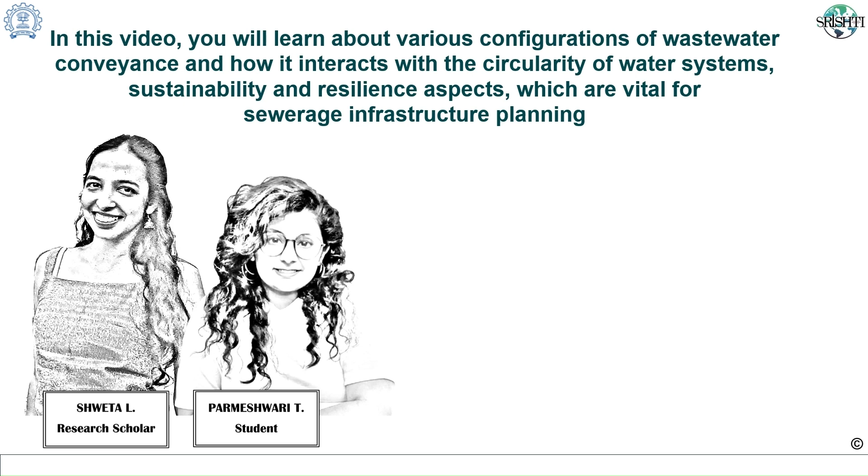In this video, you will learn about various configurations of wastewater conveyance which are vital for sewerage infrastructure planning. Welcome to our city. As you are all aware, cities typically consist of various types of areas and building typologies, such as residential buildings, where people reside, and depending on their standard of living and types of houses, residential areas are classified as high income, middle income, and low income housing.

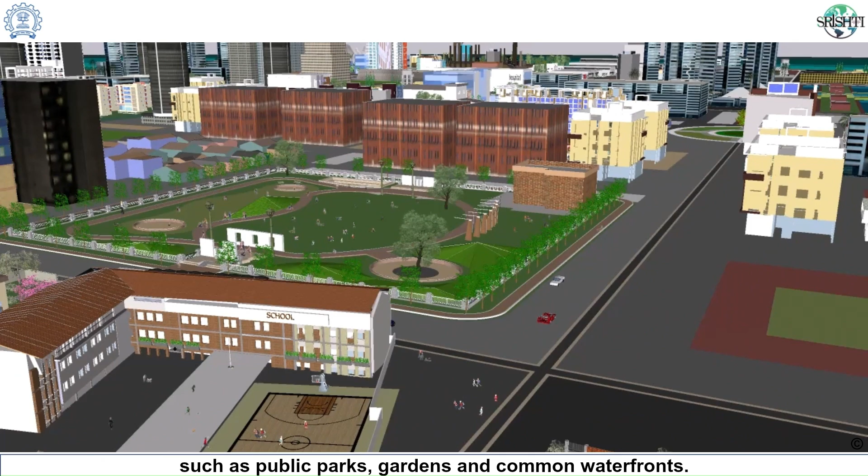Then there are commercial buildings, from where businesses operate, and these include offices, shopping centers, and restaurants. There are also institutional buildings such as hospitals, schools, and transportation hubs. Also, cities have public spaces or recreation places such as public parks, gardens, and common waterfronts. Depending on the city, some industries or factories may also be present where goods are produced or stored. At times, agricultural areas may be present near the city's fringes. There are several water bodies near or amidst the city.

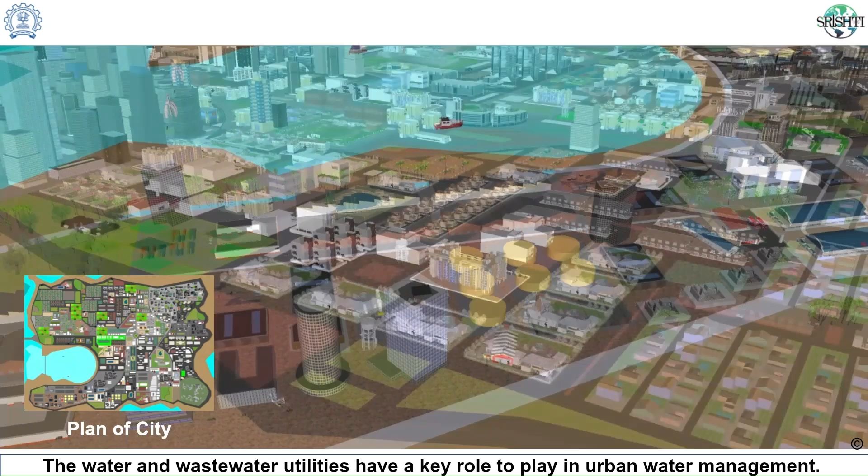Hey, but why are the water bodies so polluted these days? Unfortunately, this is true. Water is a lifeline we often overlook. The urban water systems are the unsung heroes that keep our cities hydrated and thriving. And how it is managed can greatly impact our daily lives. The water and wastewater utilities have a key role to play in urban water management. As for all citizens, it is important to understand how water interacts with different parts of the city.

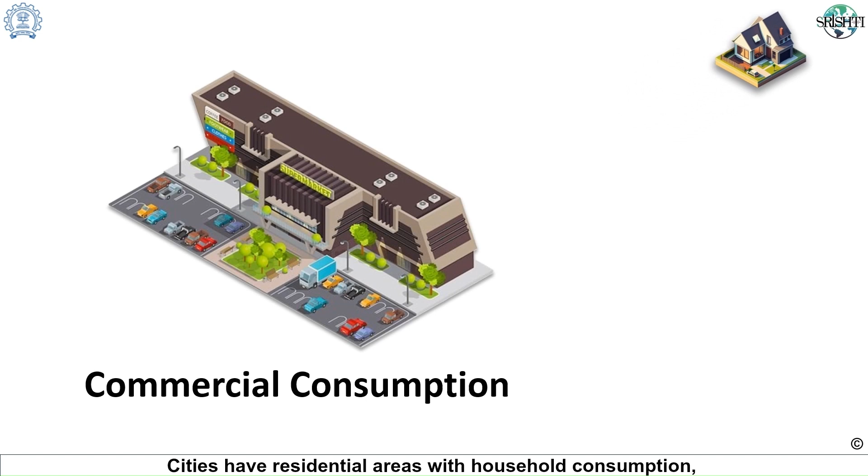Water interacts with city? What do you mean by that? Well, let us understand the present approach of water provisioning in cities and its environmental implications. Cities have residential areas with household consumption, commercial and institutional demands, agricultural landscapes or recreation spaces, industries, and various natural water bodies. We have an electricity grid to provide energy. Every city has a mix of all these elements having various water demands.

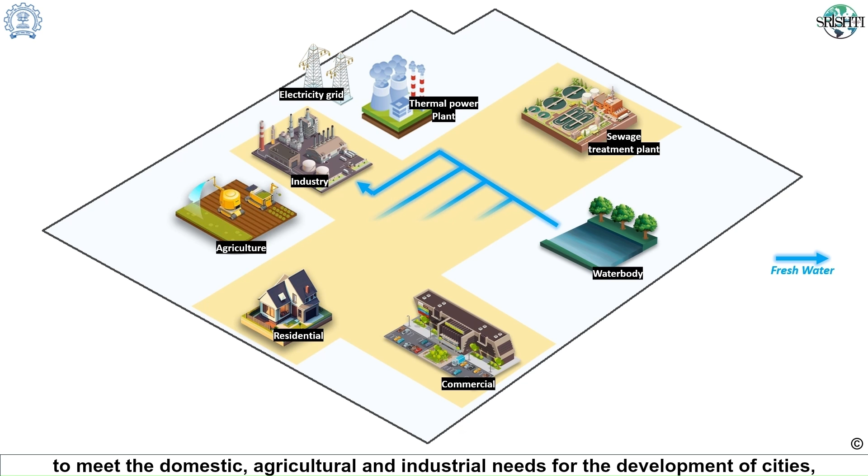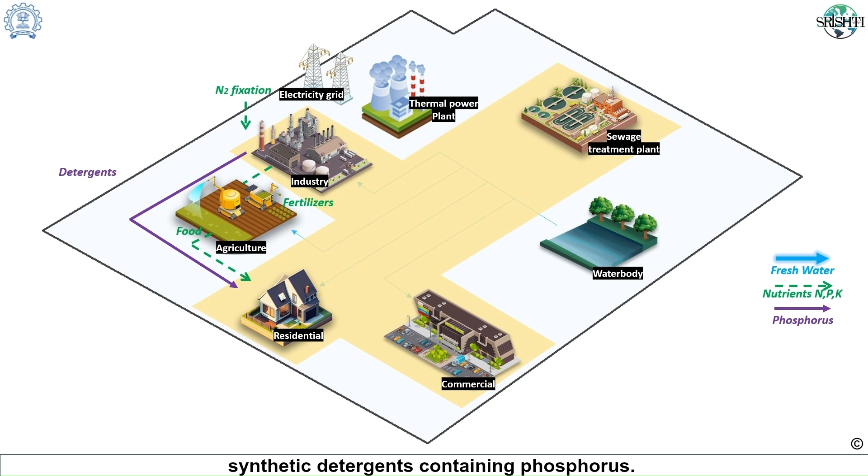Typically, fresh water is transported from long distances to meet the domestic, agricultural, and industrial needs for the development of cities, which involves huge transportation costs and consumes energy. Conventionally, agriculture involves indiscriminately using artificial nitrogen fertilizers, and the fertilizer production is highly energy intensive. Additionally, urban citizens are increasingly consuming synthetic detergents containing phosphorus. Furthermore, apart from domestic sewage, the modern lifestyle of urban citizens has introduced emerging contaminants through pesticides, insecticides, cosmetics, toxic wastes from industries, etc. All of this consumed water finds its way to the centralized sewage treatment plants.

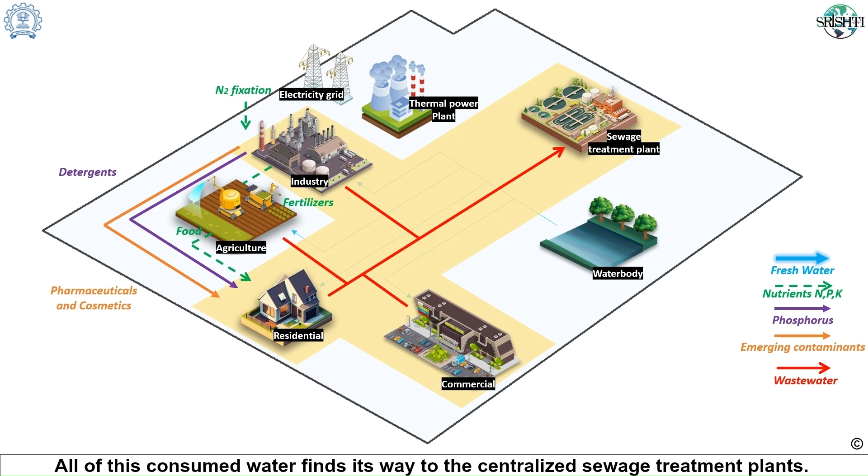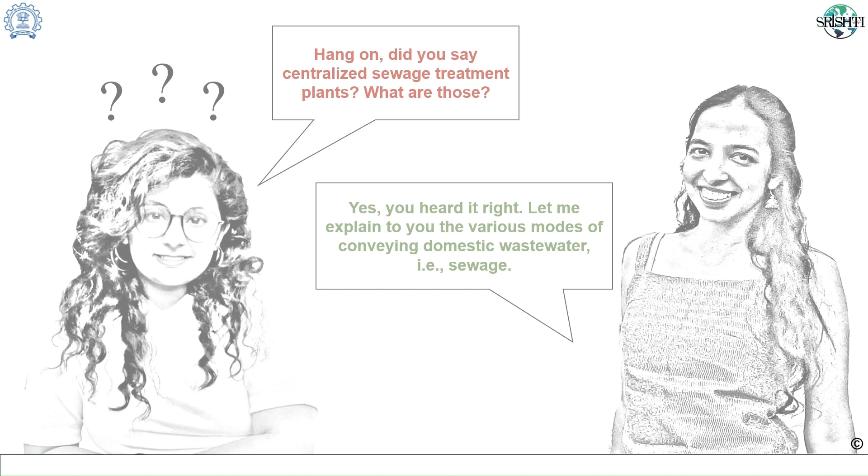Hang on. Did you say centralized sewage treatment plants? What are those? Yes, you heard it right. Let me explain to you the various modes of conveying domestic wastewater, that is, sewage. Practically, every region has a variety of settings such as rural, peri-urban, and urban. Even in an urban city, there may be pockets of informal settlements or a diverse housing typology. Some cities might have adjoining agricultural or industrial areas.

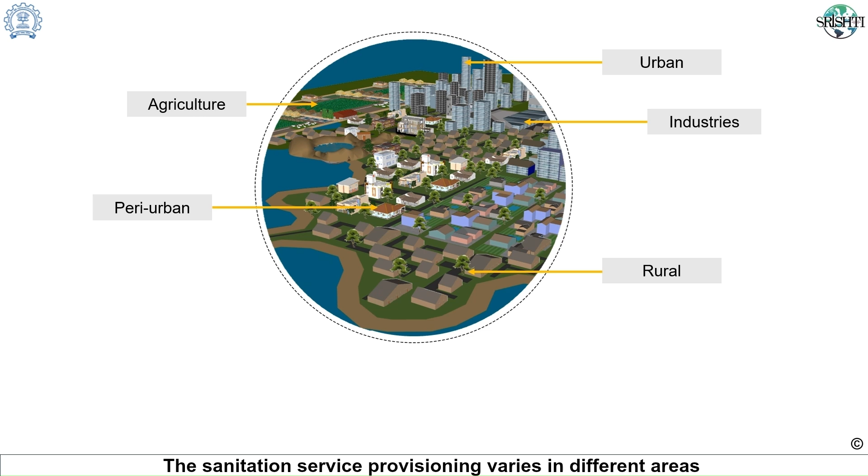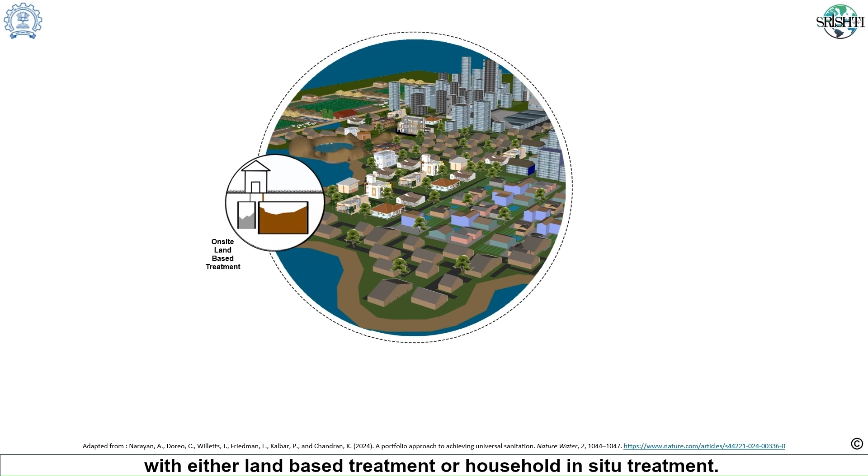The sanitation service provisioning varies in different areas according to the sanitation infrastructure, that is, the type of toilets and whether the different wastewater streams are separated or combined. Accordingly, the wastewater characteristics vary in different regions. Some areas might have on-site sanitation facilities with either land-based treatment or household in-situ treatment. Some areas may have on-site storage, transport, and treatment of wastewater. Usually, in cities, sewage is transported through sewer networks and collected in sewage treatment plants.

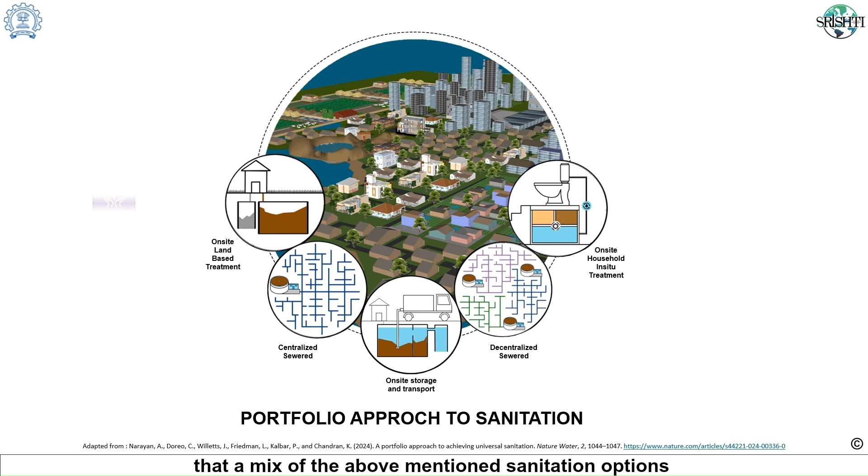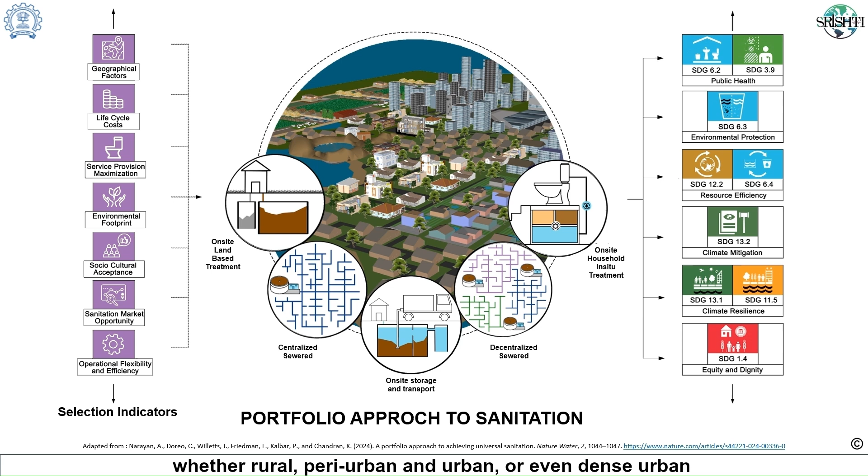The portfolio approach emphasizes that a mix of the above-mentioned sanitation options could be relevant for a city or a region, and selection indicators beyond economics should be used to choose the appropriate sanitation option as per the ground situation and decision-making context, whether rural, peri-urban and urban or even dense urban, to achieve various outcomes such as the Sustainable Development Goals. The portfolio approach provides an opportunity to achieve universal improved sanitation sustainably.

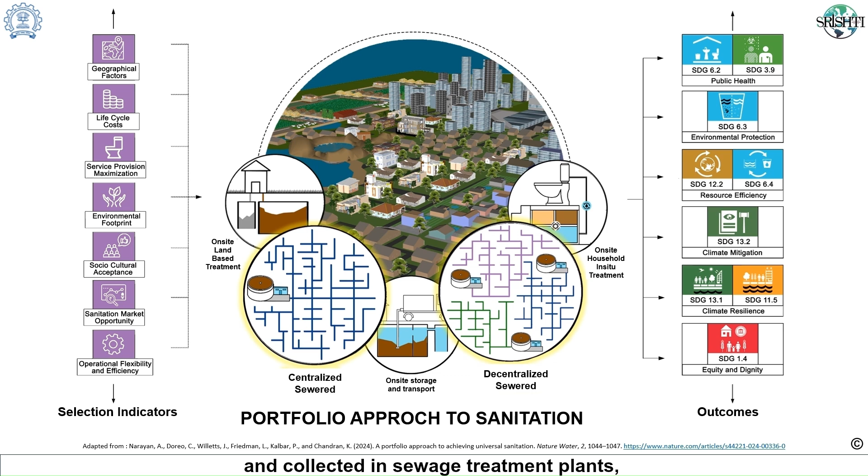Usually, in cities, sewage is transported through sewer networks and collected in sewage treatment plants, which should be the aspiration for all the cities. But how to do it sustainably is a big challenge. Sewer networks can be adopted in a centralized or decentralized manner. Let us understand the difference between these configurations. Typically, designers use the centralized sewer network as the primary approach.

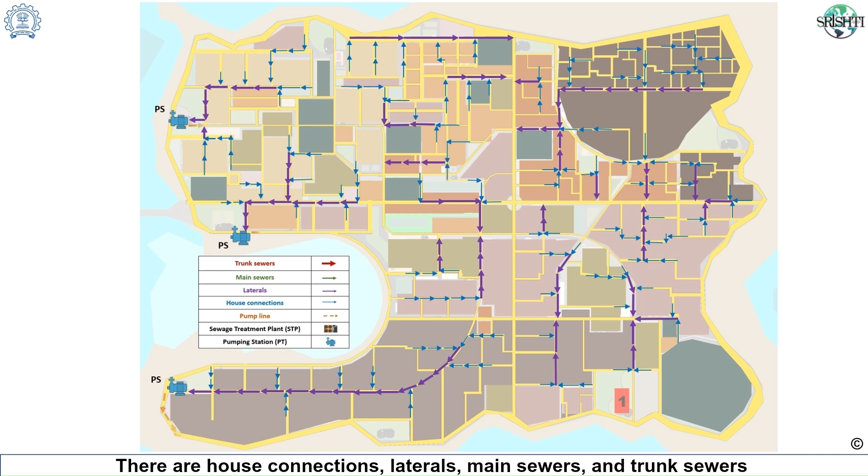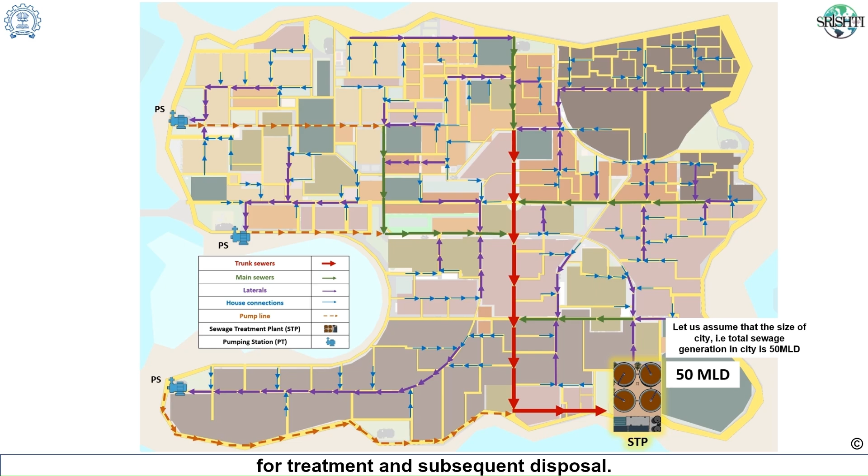Centralized sewerage infrastructure implies that the domestic wastewater or sewage is collected from the entire city or region under consideration. There are house connections, laterals, main sewers, and trunk sewers that finally carry the wastewater from far off distances to a single point of treatment. This results in a single large capacity of treatment plants, and since it is difficult to find a large piece of land within the city, sewage is often transported away from the city to the outskirts for treatment and subsequent disposal. The key advantage with centralized approach is that the economy of scale is reached for large-sized wastewater treatment plants, making wastewater treatment cost-effective.

Biological treatment systems also function well at a large scale. It allows for streamlined operations, implementation of advanced mechanized technologies, and sophisticated treatment processes, thus ensuring high water quality and consistency. Given the advantages of centralized infrastructure, why is most sewerage infrastructure failing? And why are centralized treatment systems being criticized?

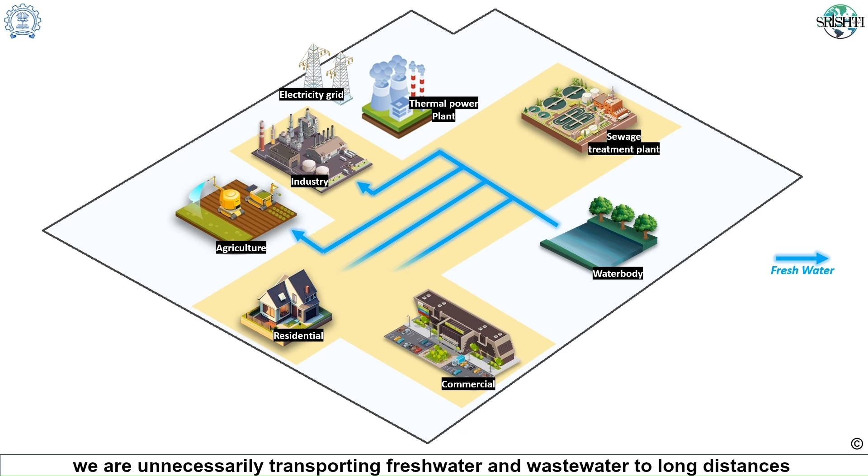There are several complexities, and every coin has two sides, right? So, if you holistically look at the region, we are unnecessarily transporting freshwater and wastewater to long distances in the process of centralization. Firstly, we spend tremendous energy to fix nitrogen for artificial fertilizer production. Next, the nutrients nitrogen and phosphorus enter the cities through food cycle and other products we use in our day-to-day lives, which find their way in the wastewater.

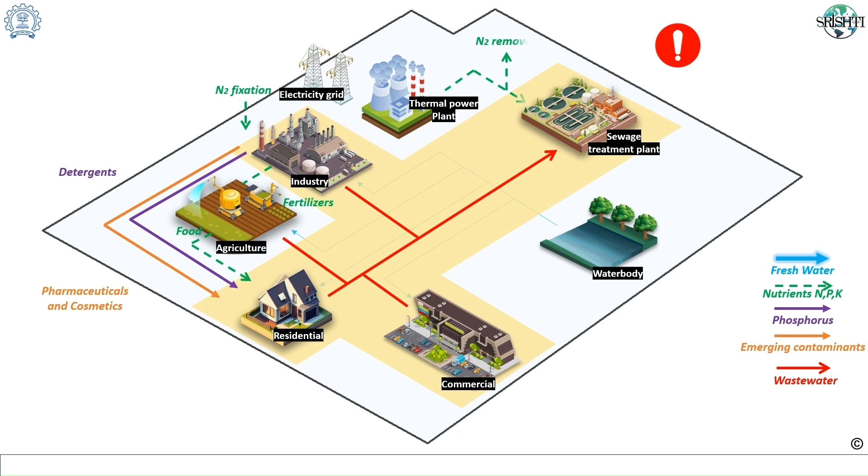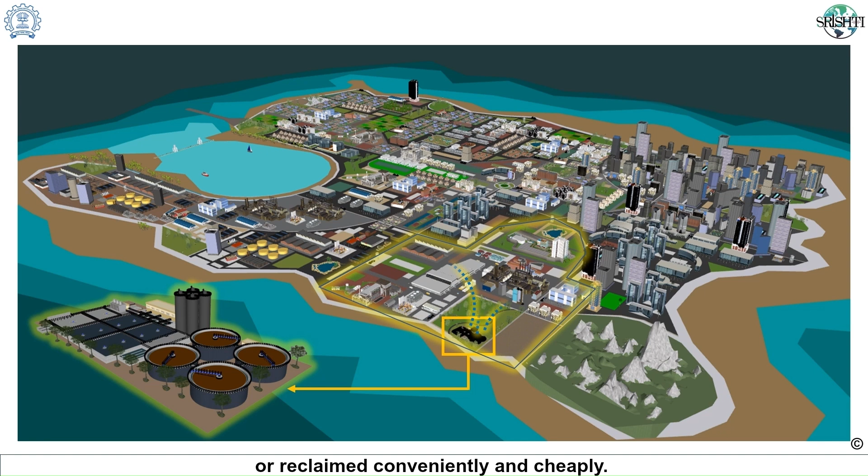If the sewage treatment plants fail to function or do not perform up to the standards, untreated or partially treated wastewater enters the water bodies and causes eutrophication. Also, it is difficult to achieve water circularity in centralized systems as long redistribution networks might need to be constructed. Hence, only a small fraction of treated wastewater can be recycled or reclaimed conveniently and cheaply. Thus, for cities aiming to integrate circular economy practices, centralized systems are not favored.

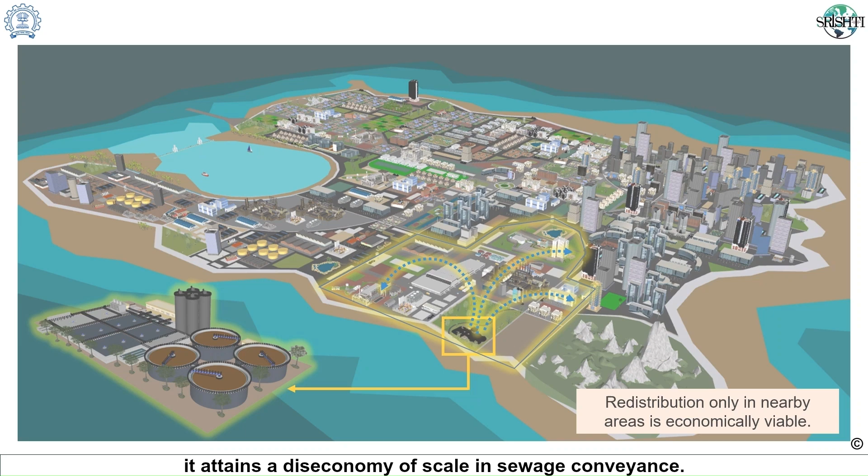Although centralized infrastructure is commonly adopted due to the scale of economies achieved in sewage treatment, it attains a diseconomy of scale in sewage conveyance. Diseconomy of scale in sewage conveyance? What do you mean by that? To understand that, you need to think from a systems perspective.

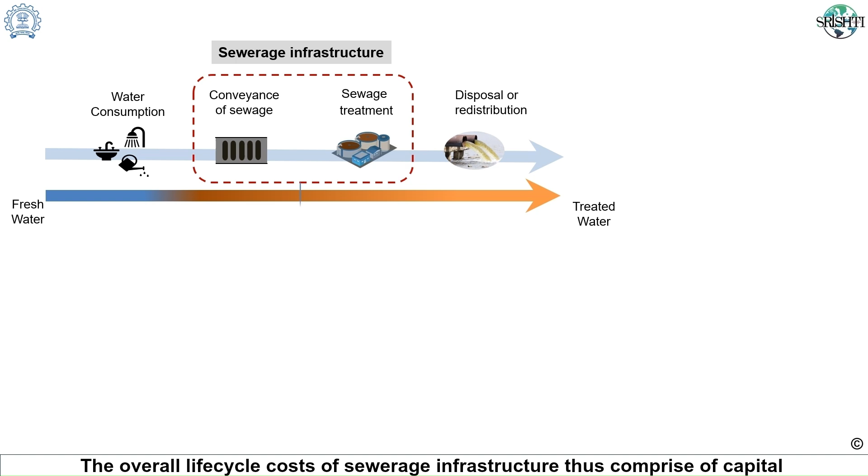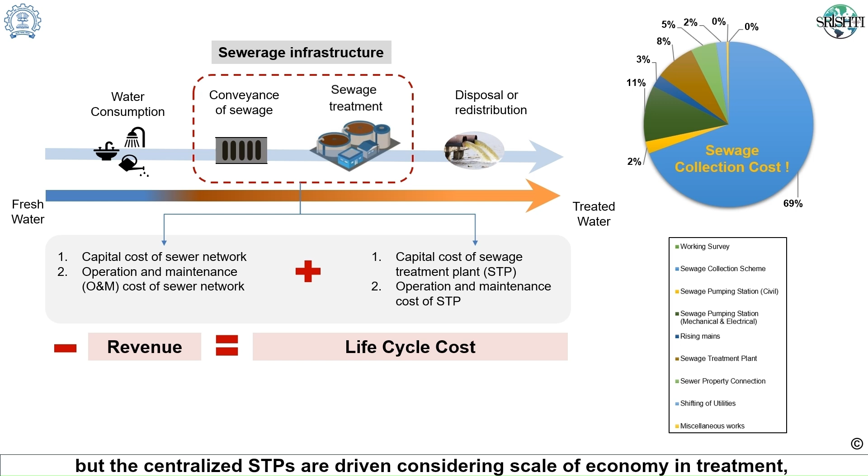The sewerage infrastructure comprises of sewer networks that collect wastewater and sewage treatment plants. The overall life cycle costs of sewerage infrastructure thus comprise of capital and operation and maintenance costs of the sewer network as well as the sewage treatment plants. The network cost constitutes a major share of the total cost, but the centralized STPs are driven considering scale of economy in treatment, which constitutes 20 to 30% of the project cost.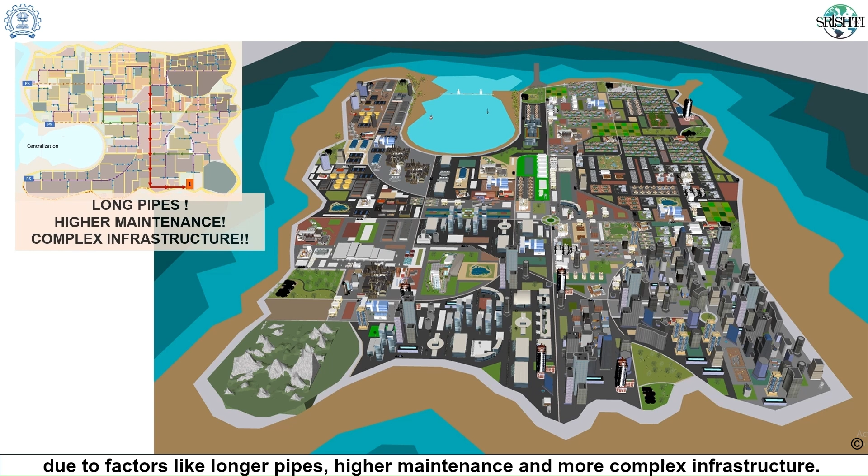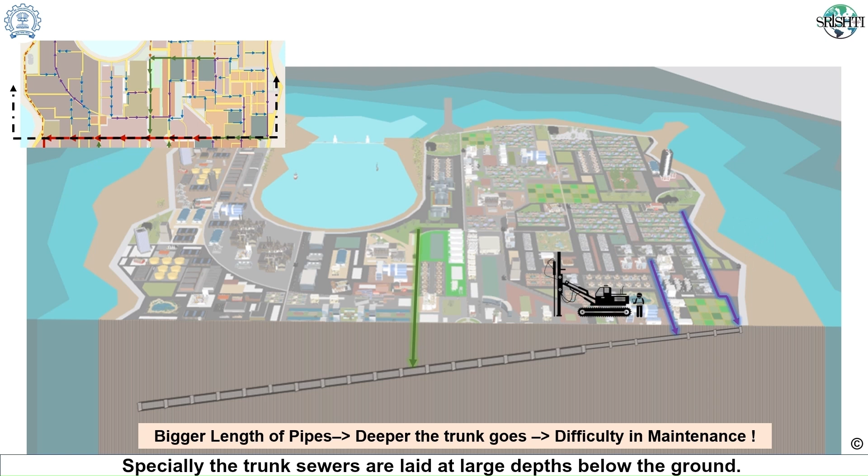Although centralized treatment is cost effective, it leads to massive investments in laying the sewer network. The sewers are laid at a slope for using the gravity. Hence, long sewer lengths lead to deeper sewers. Especially the trunk sewers are laid at large depths below the ground. The construction of these trunk sewers involves massive excavation, and such mega projects often result in huge delays.

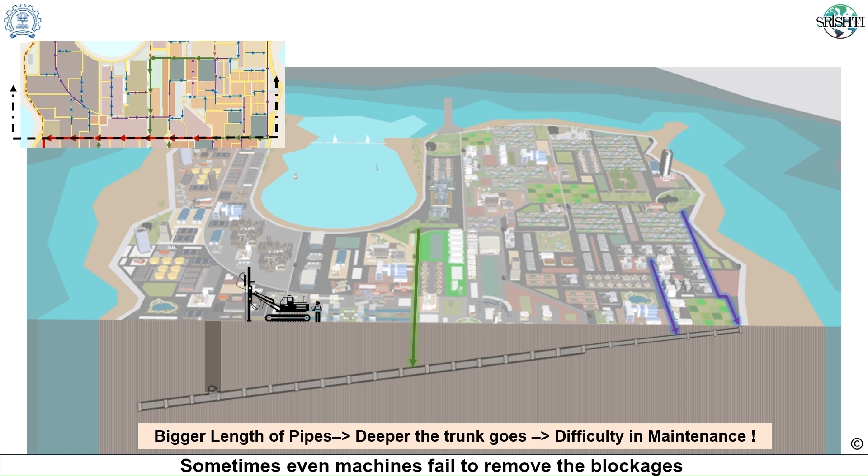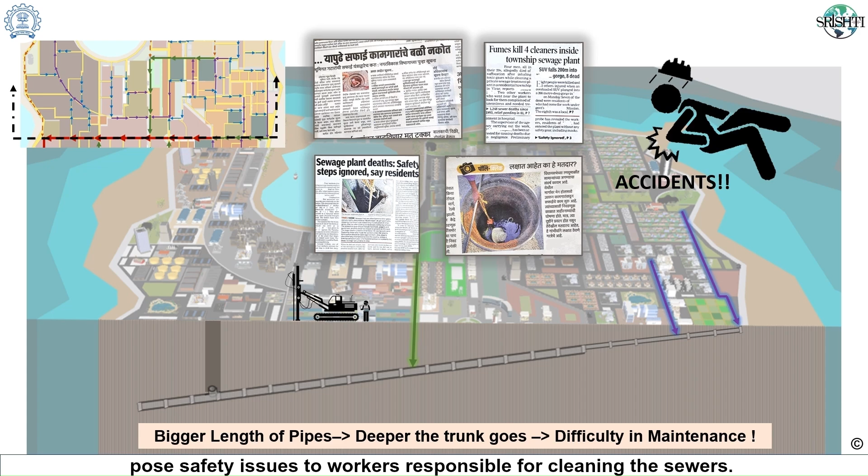Additionally, these sewers are difficult and costly to maintain in the long run. Complex equipment and machinery are needed for cleaning the choked sewer lines. Sometimes, even machines fail to remove the blockages, and sanitation workers are forced to enter the manholes to clean the sewers. Despite the legal ban on manual scavenging, it is still practiced in cities, as evident from such news articles. Thus, the deep sewers in highly centralized systems pose safety issues to workers responsible for cleaning the sewers.

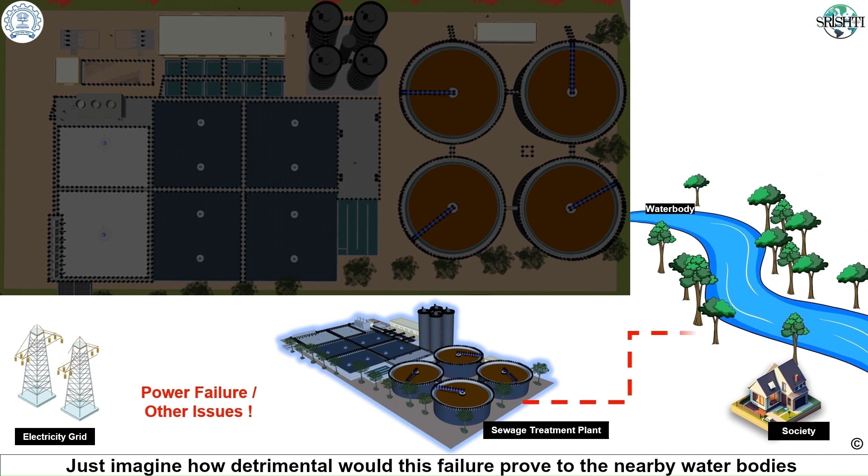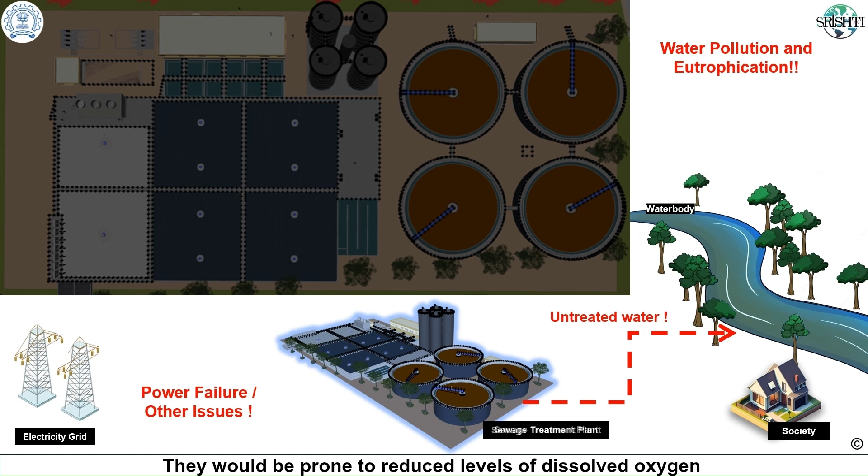Moreover, extreme centralization comes with significant risks, as they are highly vulnerable. A single large-sized STP serves as a single point of failure in case of equipment malfunction, a natural disaster, or an act of vandalism. And this can disrupt the wastewater treatment services for the entire city. Just imagine, how detrimental would this failure prove to the nearby water bodies where untreated wastewater is being disposed? They would be prone to reduced levels of dissolved oxygen, affecting the marine ecology, and also prone to eutrophication.

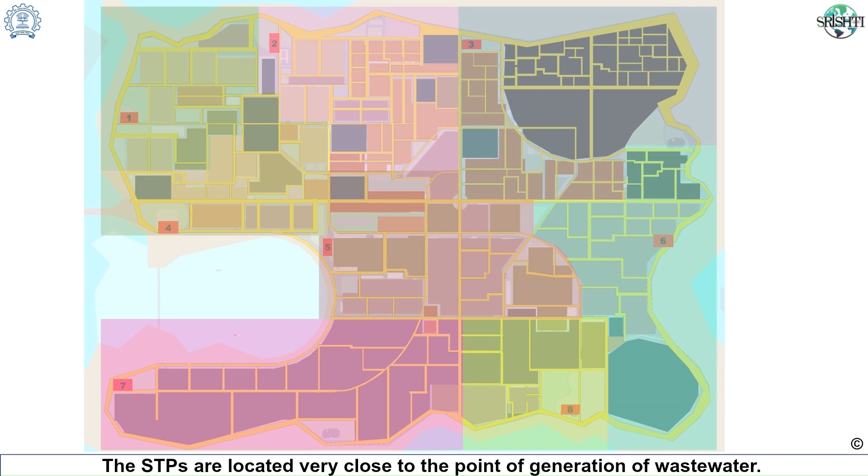Oh, I understand now. As per my knowledge, decentralized infrastructure is the alternative for centralized systems, right? But what do you exactly mean by decentralization? Okay, now let us explore the decentralized network configuration. In this scenario, there are several STPs for the city or region under consideration. The STPs are located very close to the point of generation of wastewater. This eliminates the long sewer networks and facilitates simultaneous implementation of multiple STPs. This reduces the overall time of implementing the project.

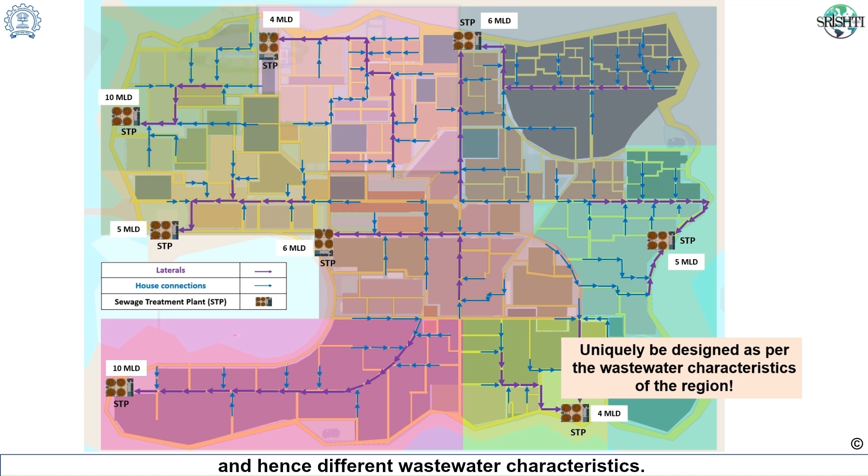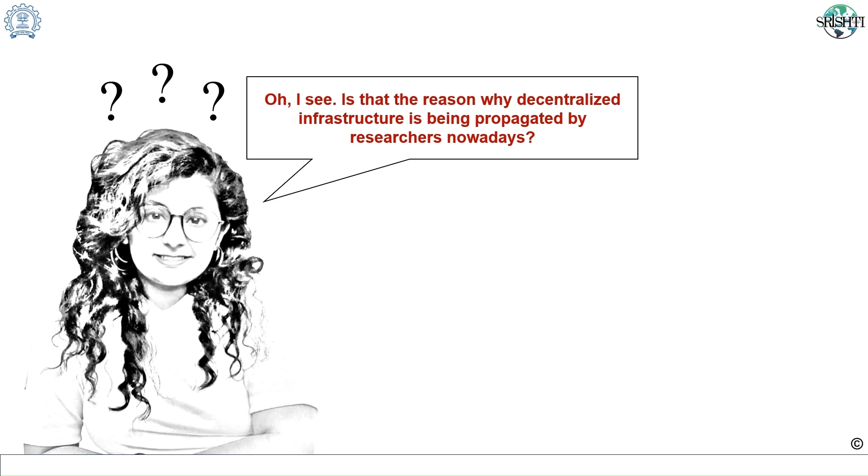Moreover, each of the served areas may have different water demands and hence different wastewater characteristics. For example, wastewater generated from the residential, commercial, and industrial land uses may differ slightly. Decentralized treatment facilities can uniquely be designed as per the wastewater characteristics of the region. Oh, I see. Is that the reason why decentralized infrastructure is being propagated by researchers nowadays? Yes, there are several advantages of decentralized systems.

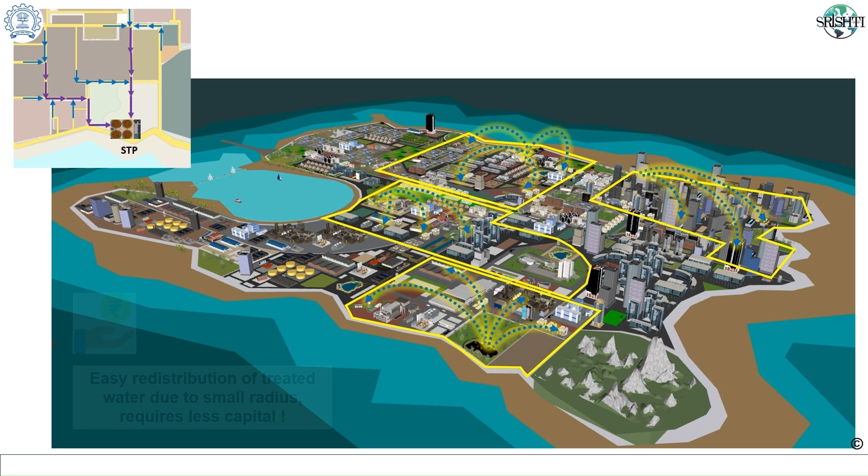Especially if the cities are to adopt a circular approach for water management, decentralized systems are highly suitable. They serve as alternate sources of water, which can be used for secondary purposes such as toilet flushing or landscaping. Also, if one STP fails or encounters an issue, it impacts only a small area, not the entire city, as the sewage treatment service is disconnected among all STPs. The different STPs can adopt location-specific sewage treatment technologies.

Okay, so as I understand, decentralized configurations are pretty resilient. They should definitely be the way ahead for infrastructure planning, right?

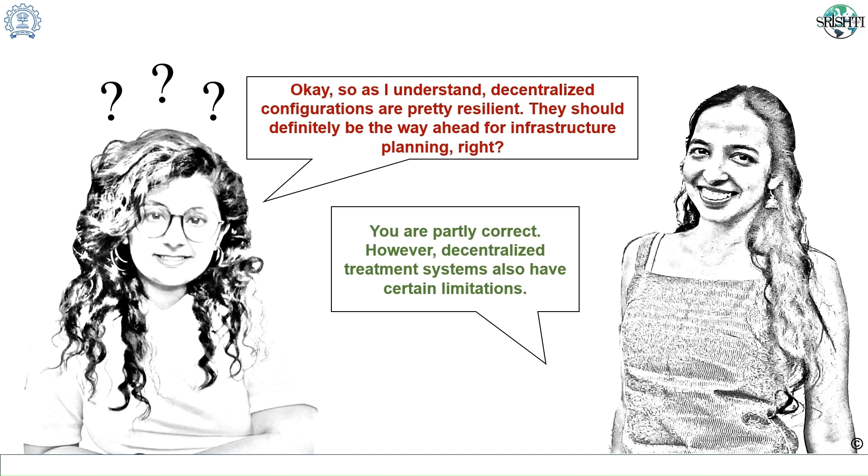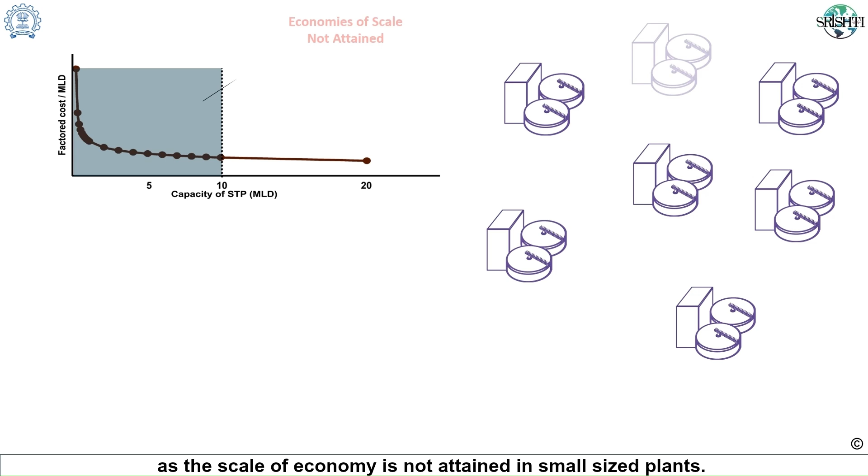You are partly correct. However, decentralized treatment systems also have certain limitations. Managing and maintaining numerous independent systems can be costly and cumbersome for wastewater utilities. If too small-sized sewage treatment plants are planned using biological treatment, the STP tends to fail or incurs substantial costs,

as the scale of economy is not attained in small-sized plants. In case of lack of ownership by the households or residential dwellers in operation and maintenance of STPs, governing a large number of STPs might become a huge challenge for the wastewater utilities. Thus, coordinating the effective maintenance and ensuring compliance with regulations can be burdensome for the regulatory authorities.

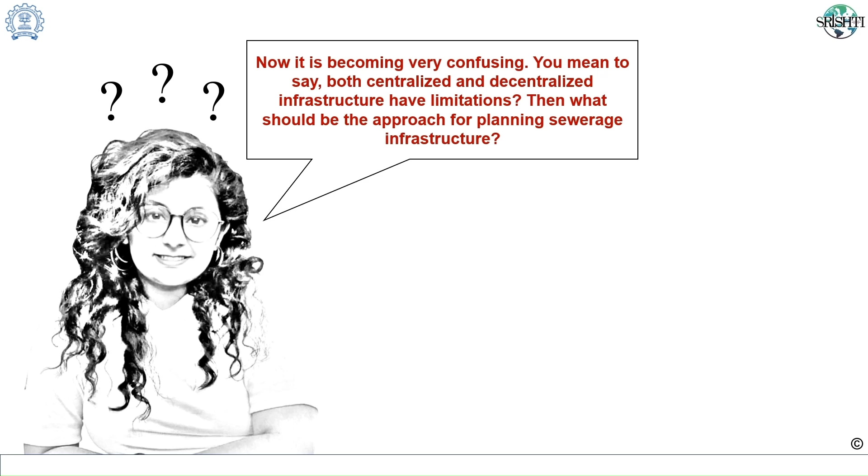Now it is becoming very confusing. You mean to say both centralized and decentralized infrastructure have limitations? Then what should be the approach for planning sewerage infrastructure?

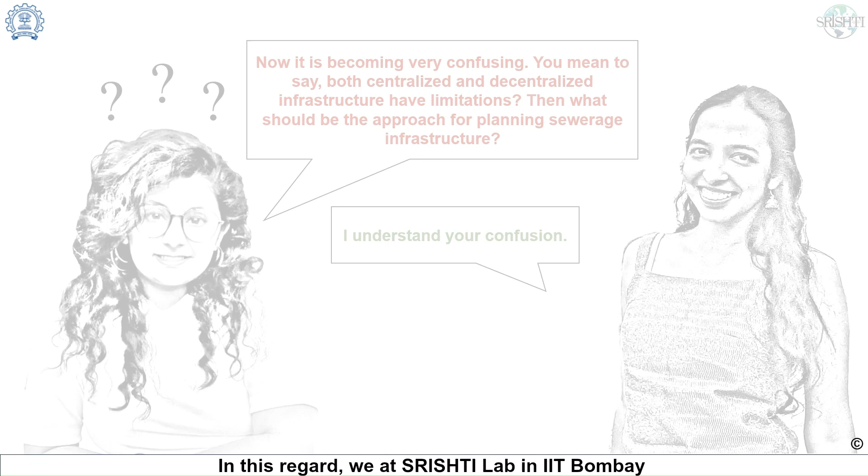I understand your confusion. In this regard, we at Srishti Lab in IIT Bombay have developed the concept of appropriately scaled decentralization. I assume that by now you are at least able to appreciate the complexities of planning sewerage infrastructure.

You see, when we talk about decentralized systems, it can mean several alternatives. So, deciding the scale of implementing decentralized infrastructure is very crucial. As we discussed, extreme decentralization also has its own challenges.

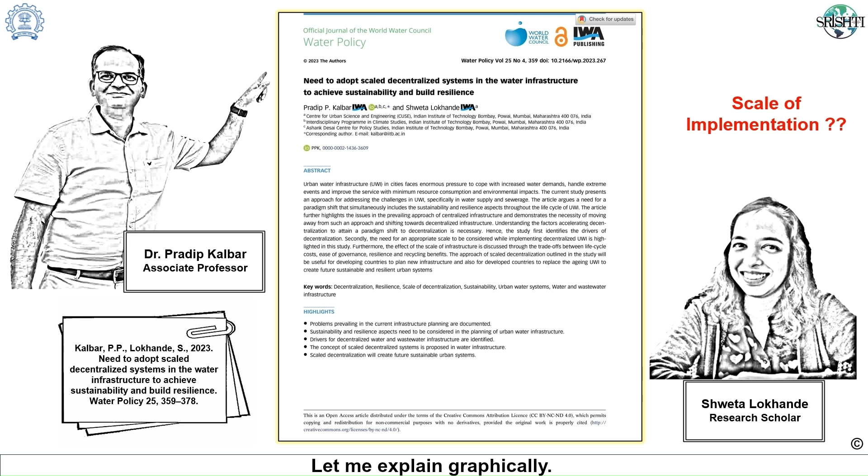Let me explain graphically. In this figure, the x-axis represents the scale or extent of decentralization. On one side, there are highly centralized systems, say at city scale. On the other hand, there are extreme decentralized systems, say at building scale.

In this figure, the notional trends of each driver are represented, which are normalized on a scale of, say, 0 to 1.

The life cycle cost is highest for centralized systems due to large infrastructure scale and intense energy usage. It reduces as we move towards decentralization, but again increases due to increased number of sewage treatment plants.

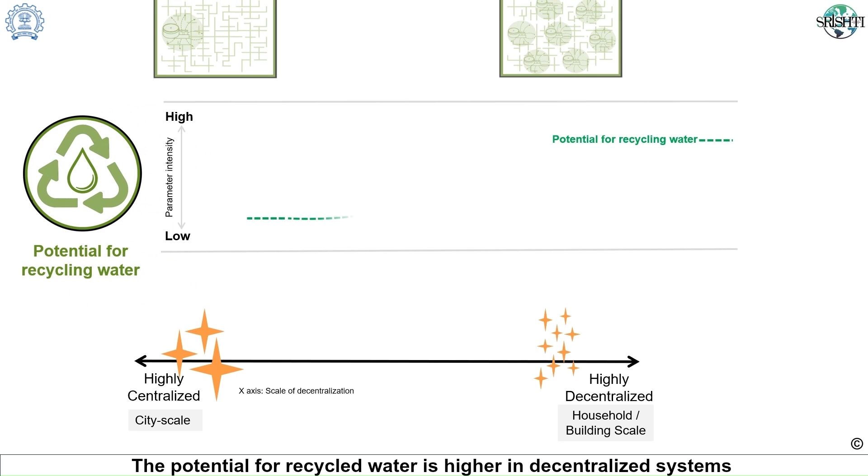Social benefits in terms of local employment opportunities and community participation are higher in decentralized systems. The potential for recycled water is higher in decentralized systems where water is treated at the source and can be used at lower redistribution costs.

Efficient resource recovery depends on source separation, which is better achieved in a decentralized system. But for resource recovery to be economically viable, some scale is needed, which is sought somewhere in the middle.

The environmental impacts are higher in centralized systems due to intensive use of energy. It reduces and again increases towards decentralization due to higher resource consumption in decentralized STPs.

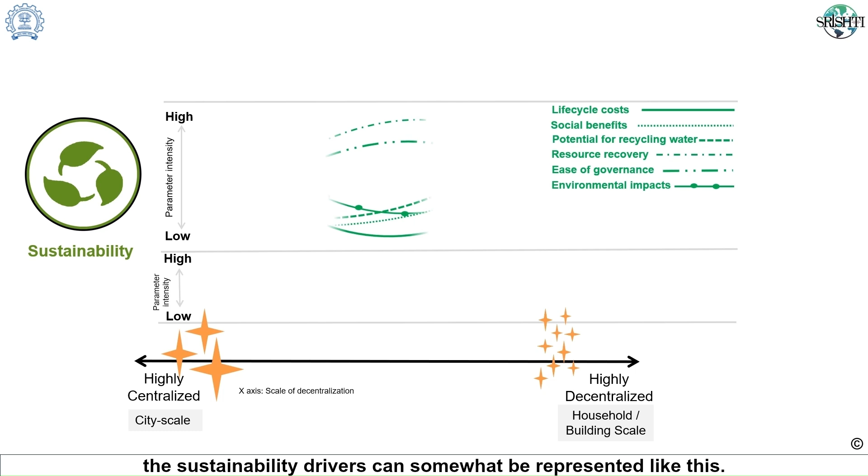Ease of governance is also considered to be maximum at the center, as the complexity of outsourcing and commissioning the projects increases for larger centralized systems. Also, operation and maintenance cost can become cumbersome for too many systems and is hence better achieved at community scale than household level. If all these trends are superimposed, the sustainability drivers can somewhat be represented like this.

Oh, sustainability is such a complex phenomenon. Understanding it itself is so difficult. I'm sure quantifying it must be immensely challenging.

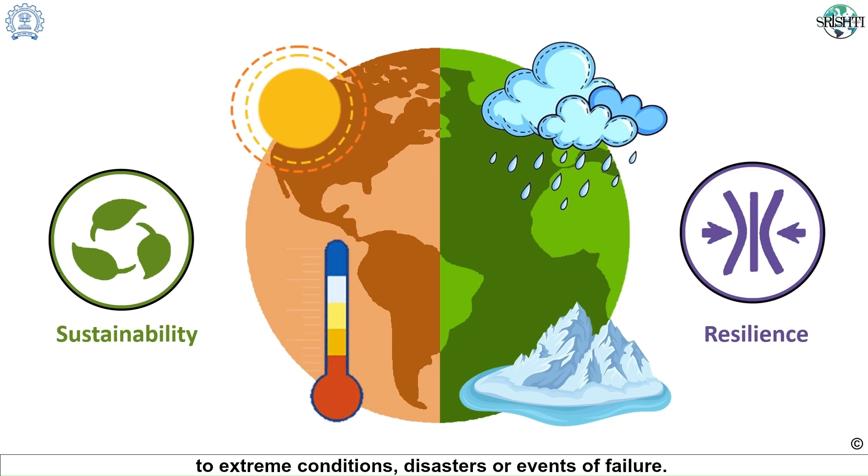True that. Not just sustainability, there's more to it. You must have heard of climate change, right? Climate change is a global challenge. Sustainability is associated with optimal usage of resources with least impacts on the environment, while resilience is associated with the response of urban water systems to extreme conditions, disasters, or events of failure.

Further, with respect to resilience, robustness denotes the ability of treatment systems to withstand disturbance without compromising service. Large-scale systems are more vulnerable to service disruption amidst failures.

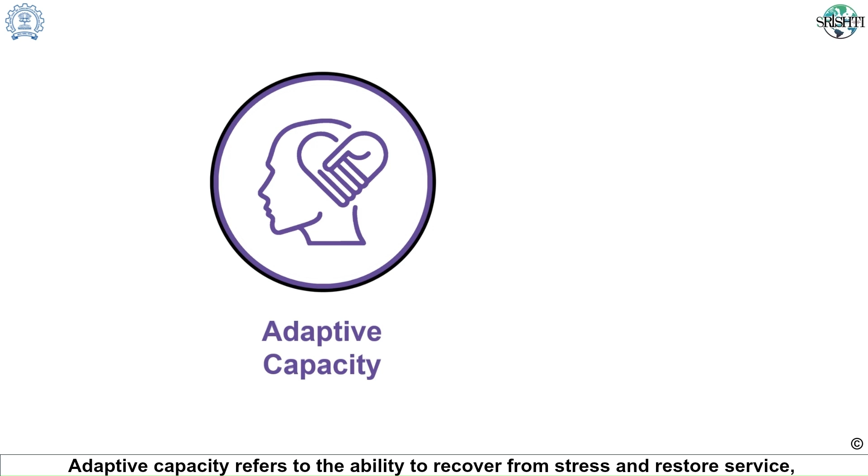Adaptive capacity refers to the ability to recover from stress and restore service, and smaller systems are easier to install and operate within a short time.

Further, flexibility involves ability of the infrastructure to respond to changed objective, for example, new norms for water quality or mandatory recycling. Phasing of infrastructure plays a key role in this regard, and decentralized systems can facilitate a flexible design.

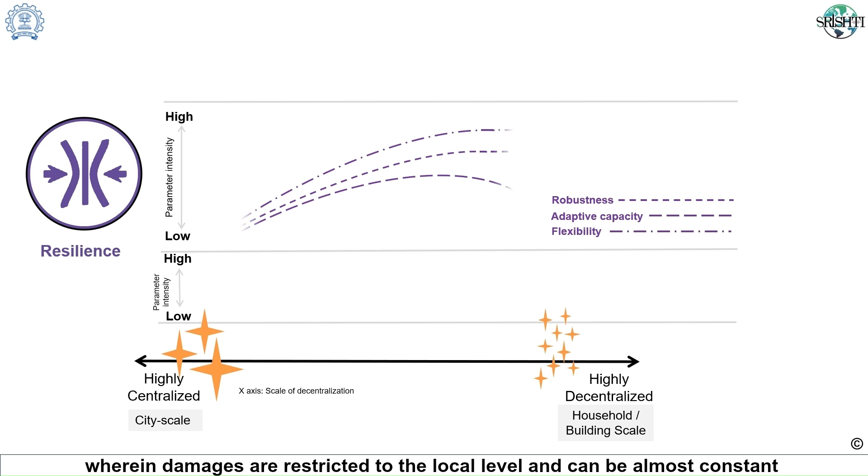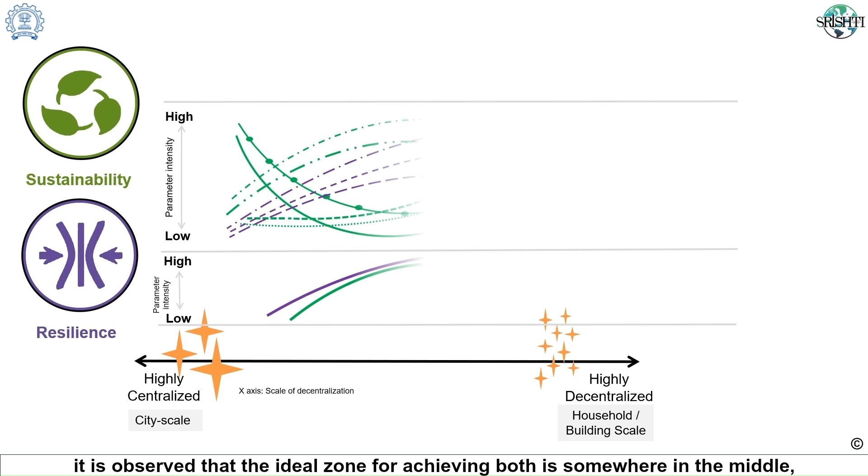Overall, resilience can be better achieved in smaller systems, wherein damages are restricted to the local level and can be almost constant till a scale is reached beyond which it reduces. Considering the sustainability and resilience aspects, it is observed that the ideal zone for achieving both is somewhere in the middle, and this is regarded as appropriately scaled decentralization.

Now I understand the significance of appropriate scale. But how to decide the optimal scale of implementation?

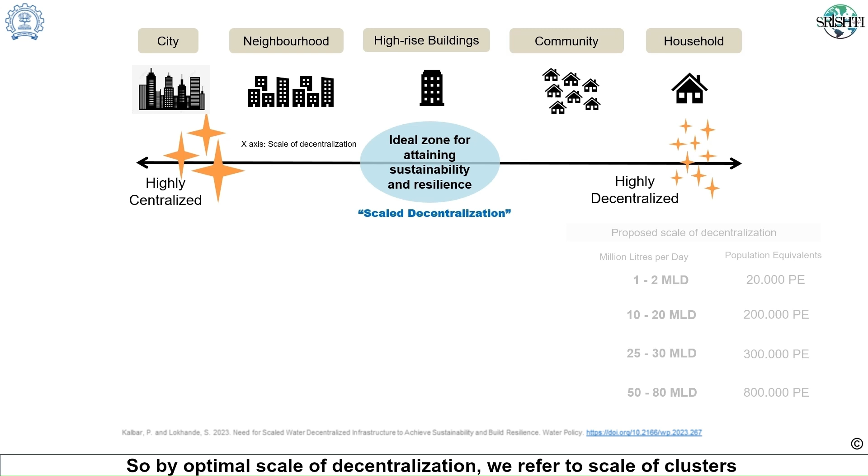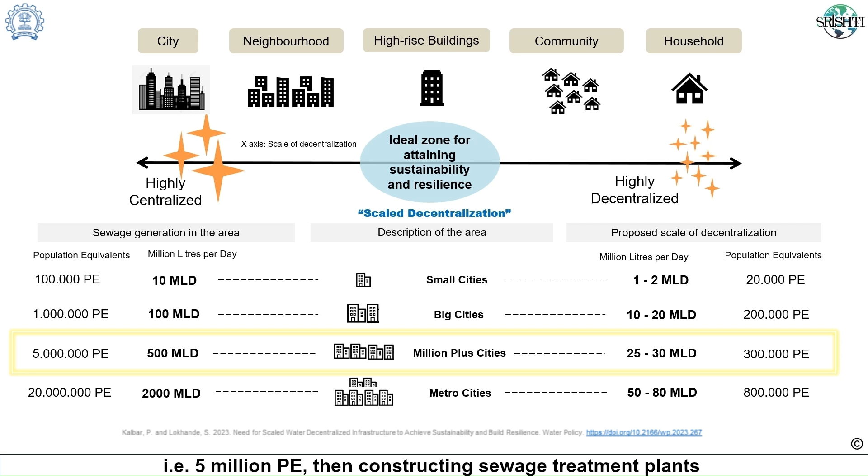Interesting question. In literature, different scales of decentralization are mentioned. So, by optimal scale of decentralization, we refer to the scale of clusters that can be made to achieve maximum benefits. We propose this scale of decentralization to be proportionate to the size of the city in terms of sewage generation in the area. For example, if a city has a total sewage generation around 500 million liters per day, that is 5 million population equivalents, then constructing sewage treatment plants having a capacity ranging from 25 to 30 MLD, that is around 300,000 population equivalents, can achieve a reasonable scale of decentralization.

Presently, these numbers are based on limited research and data, but it's the approach that we are putting forth, the approach of moving towards the optimal zone, and it needs further research to establish these numbers. Moreover, it's not that there exists one correct number for an optimal scale of systems. The idea is to avoid too small and too big scale systems by adopting scaled decentralization.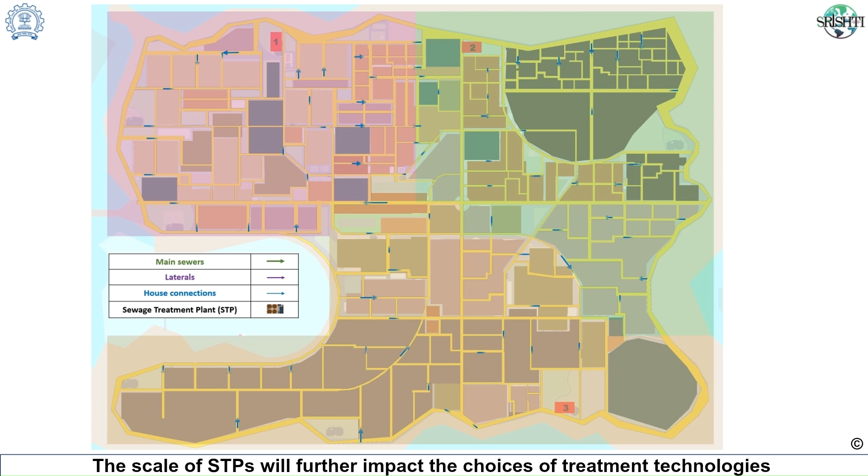Planning an appropriate scale for implementing sewerage infrastructure is the most crucial aspect of decision making, which needs to be understood by planners, consultants, and decision makers. The scale of STPs will further impact the choices of treatment technologies at a particular location. These decisions have implications in the long run and affect the infrastructure sustenance and finances significantly.

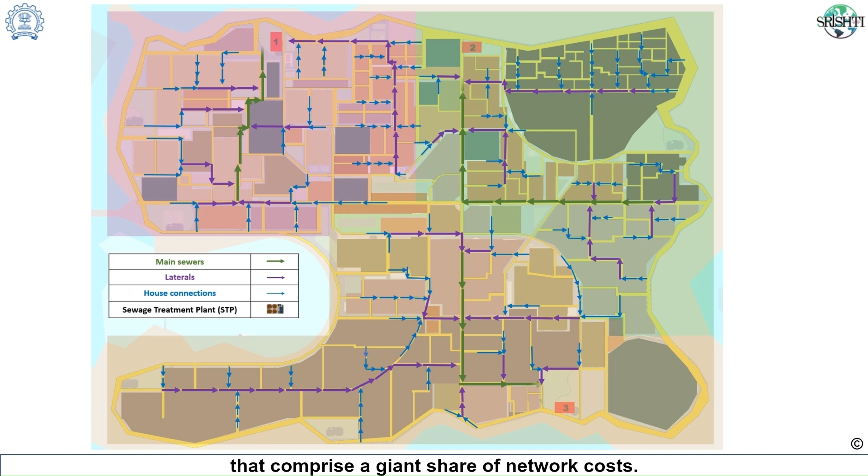By implementing scaled decentralization, we can strategically eliminate the main sewers that comprise a giant share of network costs. The approach of appropriately scaled decentralization can enhance resilience through decentralized water management and also gain the necessary scale of economy. Such an approach can ensure adequate and optimal usage of resources spent on infrastructure creation.

I see. So, scaled decentralization is also context specific. But what about treatment technologies? Oh, now that's another box altogether.

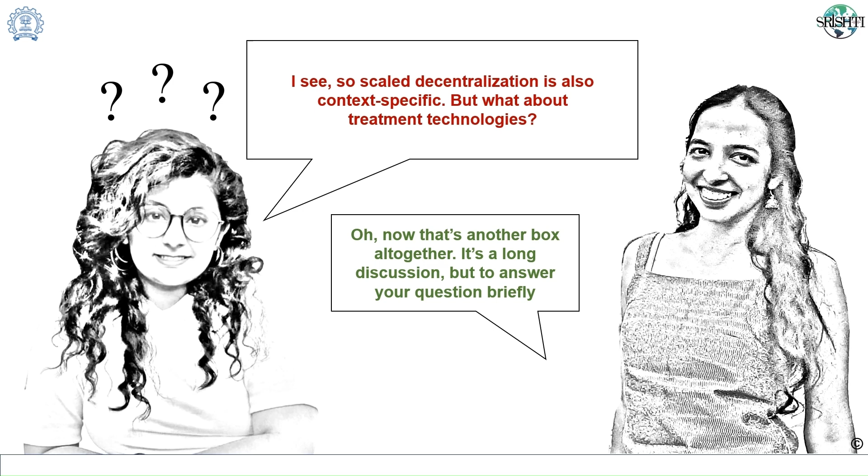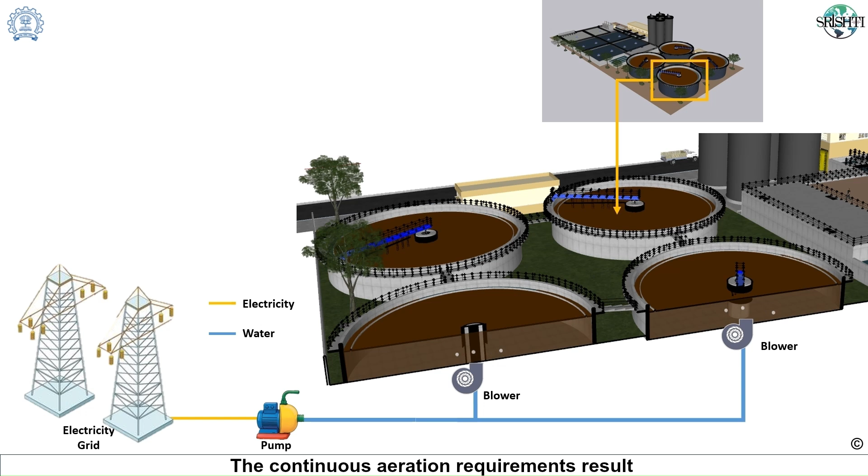It's a long discussion. But to answer your question briefly, there are several types of treatment technologies which broadly can be categorized as mechanized treatment systems and natural treatment systems. On one hand, we have mechanized treatment technologies requiring less land, but those are energy intensive as they require oxygen for bacterial degradation. The continuous aeration requirements result in heavy operation and maintenance cost for operating the wastewater treatment plant.

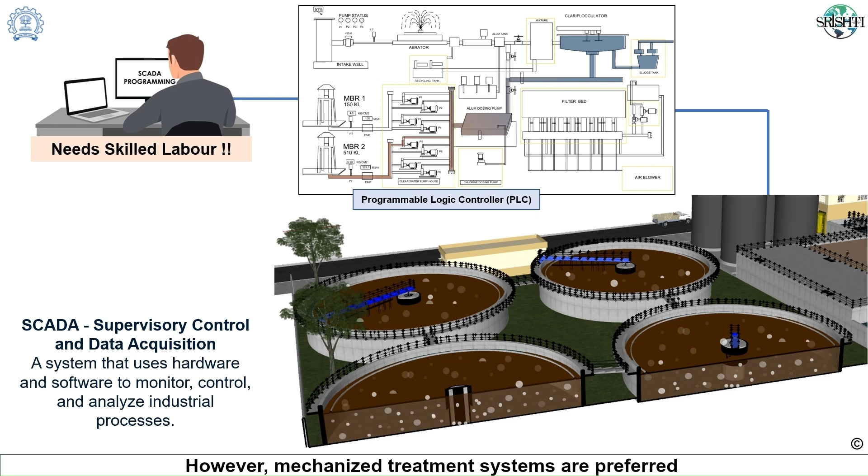In addition to elevated costs, the high energy consumption results in greenhouse gas emissions. In this manner, in the process of addressing water pollution, we end up causing air pollution. Another concern regarding centralized STPs is that highly skilled labor is required for operation, which might not be available everywhere. However, mechanized treatment systems are preferred in regions having adequate funds, skilled labor, and land constraints.

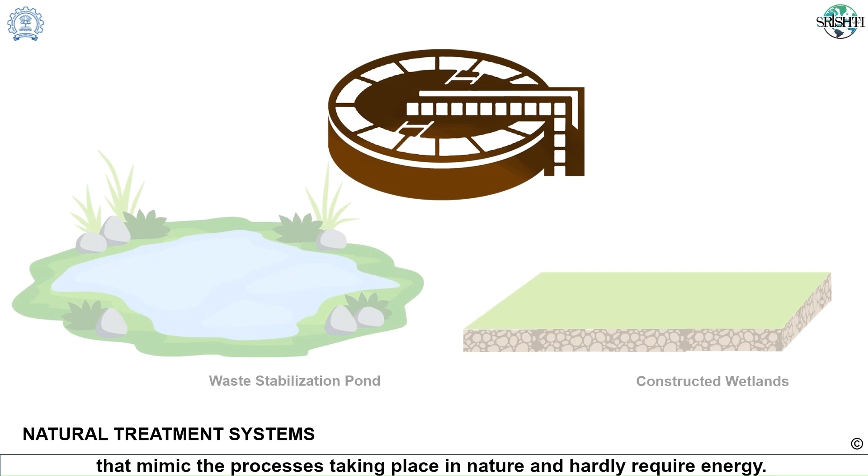On the contrary, there are natural treatment systems that mimic the processes taking place in nature and hardly require energy. These technologies can employ low-skilled labor, can be managed by local communities, and are aesthetically pleasing. Natural treatment systems have relatively higher land requirements, but could be planned strategically in the given settings.

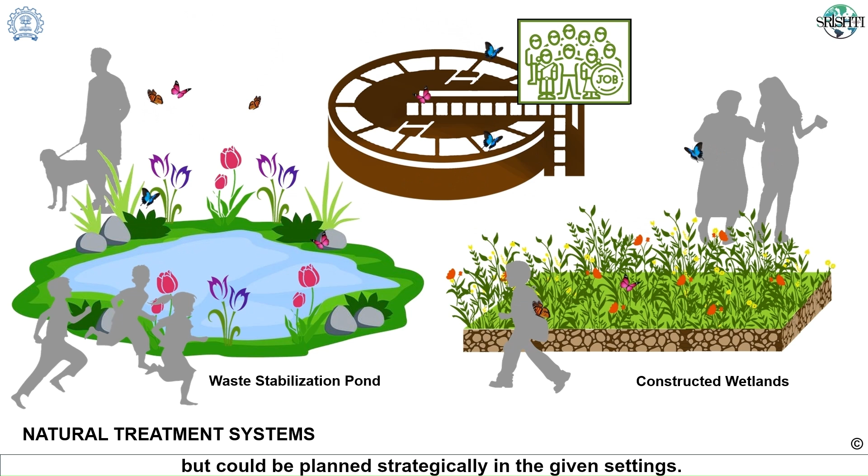Additionally, considering the trade-offs between the two treatment approaches, mechanized and natural, these could be combined strategically to gain the advantages of both approaches, and this concept is called hybrid treatment systems.

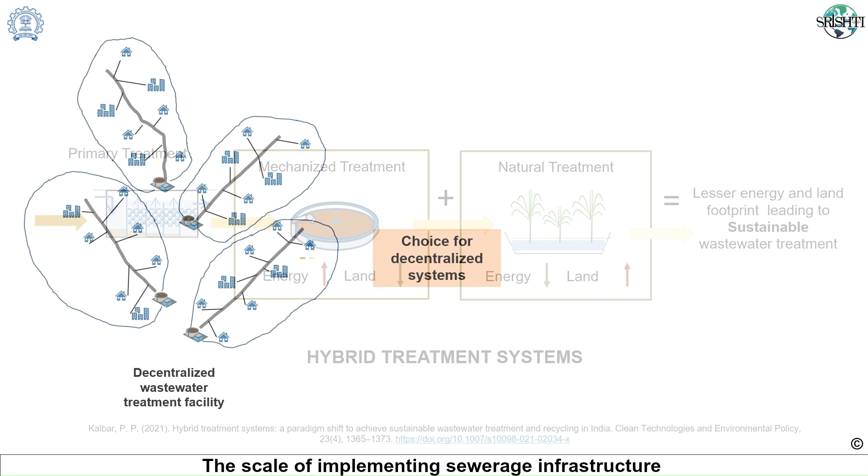The scale of implementing sewerage infrastructure surely influences the choice of wastewater treatment technologies. Interestingly, scaled decentralization could be achieved by both mechanized and natural treatment systems, and the decision needs to be taken on a case-to-case basis. Not every technology is appropriate for every city or context.

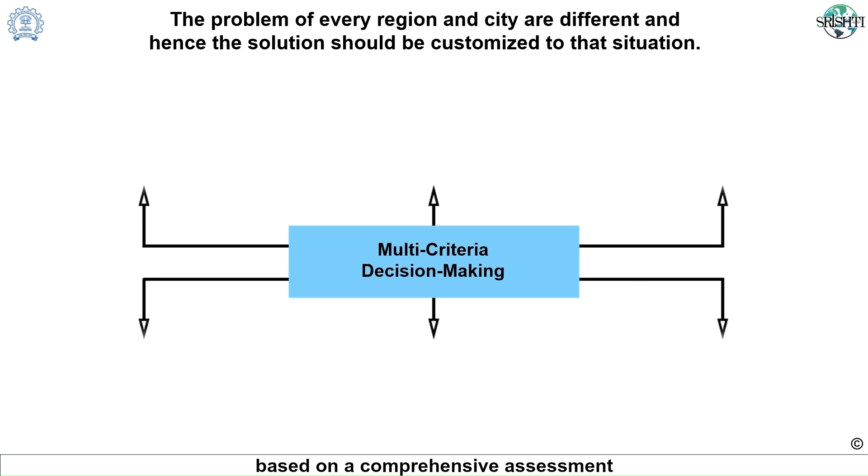In this regard, using multi-criteria decision-making techniques based on a comprehensive assessment using a wide number of indicators is needed, and decision support tools such as Jal Vishwa could be used for determining the appropriate configuration and treatment technology depending on the local context.

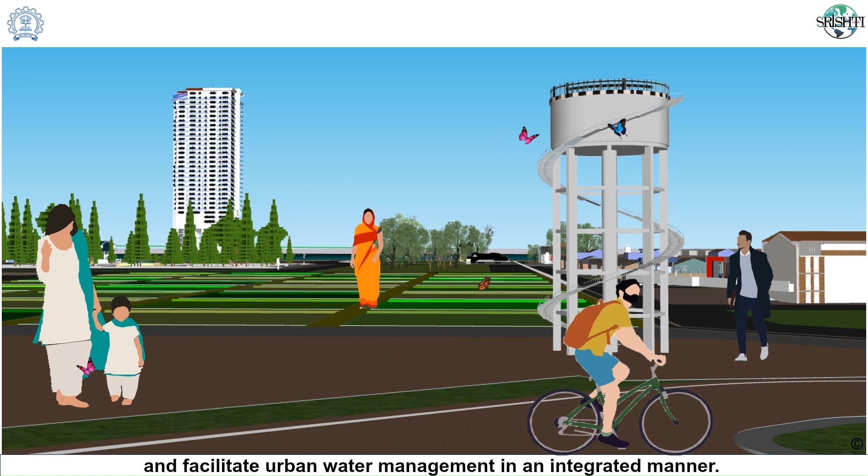By adopting scaled decentralization and appropriate wastewater treatment technologies, we can create sewerage infrastructure that is both resilient and sustainable. The various elements of city, such as land use and building typologies, can be used to plan the sewerage zones and facilitate urban water management in an integrated manner. Scaled decentralization approach can also be used for retrofitting the existing sewerage infrastructure in cities.

Yes, planning sewerage infrastructure certainly needs a bird's eye view due to its complexities. Thanks a lot for such an elaborate explanation regarding this crucial topic.

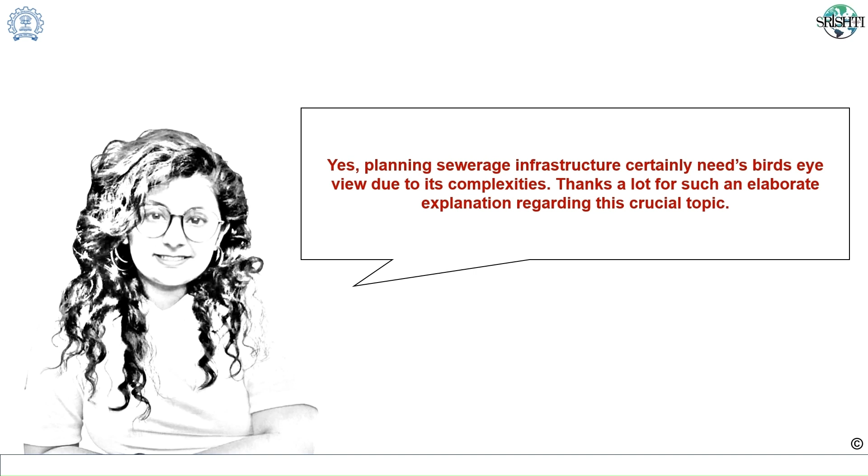Thank you for joining us on this journey of understanding the complexities of sewerage infrastructure. As a responsible citizen, it is crucial for us to understand where does our sewage flow, what does it take for the wastewater utilities to maintain the networked infrastructure. Sewerage infrastructure is often invisible, but it is highly complex and demanding in terms of skill, knowledge, finances, and resources.

We should be aware that it comes at a huge cost, and as a responsible citizen, we should be willing to pay for sewage treatment. The choices and decisions we make today will contribute to a better and more water secure future. Thank you.